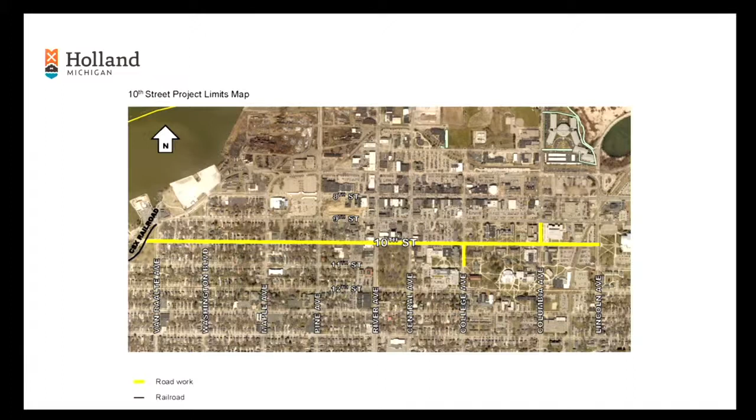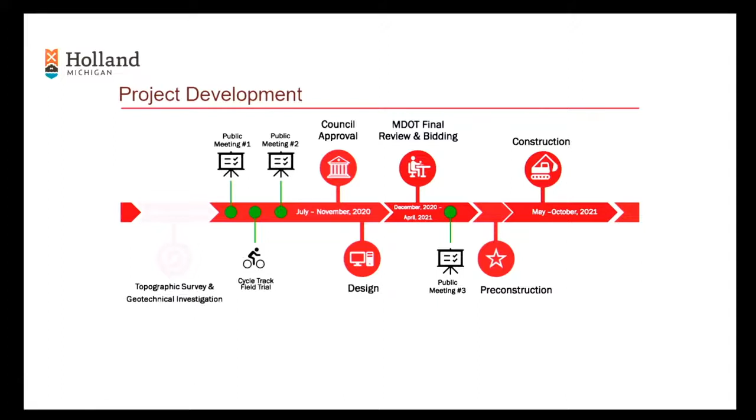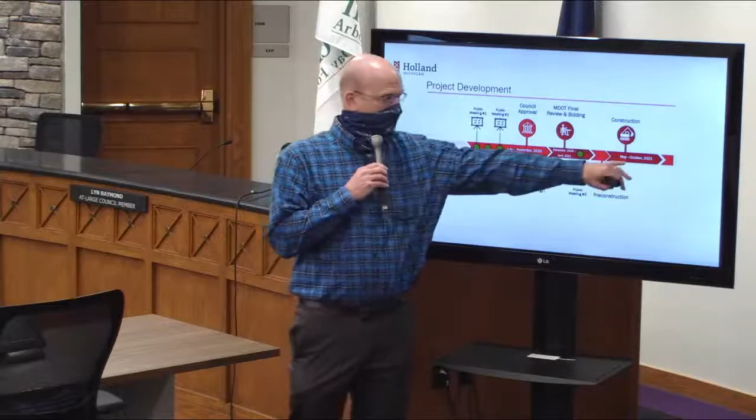The project development timeline, again you've seen this slide before, but we're basically sitting about where the star is. Public meeting number 3, we didn't quite make April, we're into May. But construction is going to get started here on May 17th, next week, Monday. And then we're going to go through the end of October with the construction schedule.

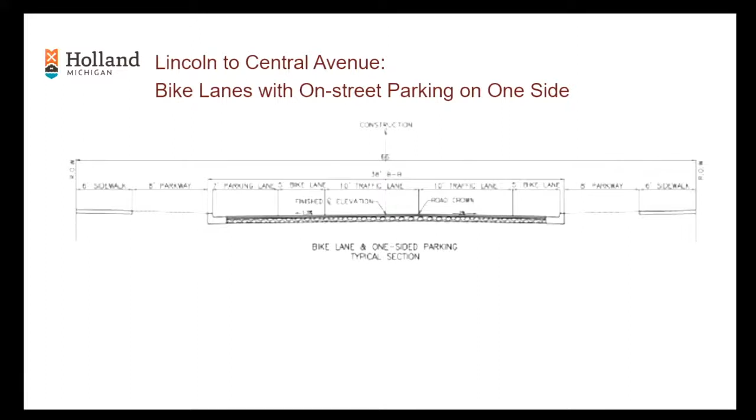In terms of the road cross section, apologize for the slide here, but I can describe it to you. From Lincoln to Central, and this is basically through College campus, we're going to have the 2 through lanes, parking on one side of the street, and bike lanes throughout.

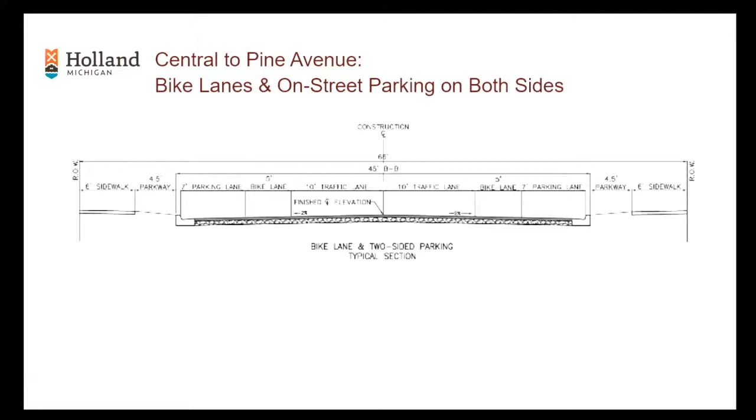Yeah, on-street parking, parallel parking. From Central to Pine, we're going to have bike lanes and on-street parking on both sides, so we're going to retain that. And then from Pine to Van Raalte, we're just going to have parking on both sides.

No non-motorized path, so no bike lane there. We will put sharrows down on the pavement, but those are going to basically be within that travel lane. So then there's going to be parking, again 8-foot wide parking on both sides, 10-foot travel lanes, very similar to what it is now out there.

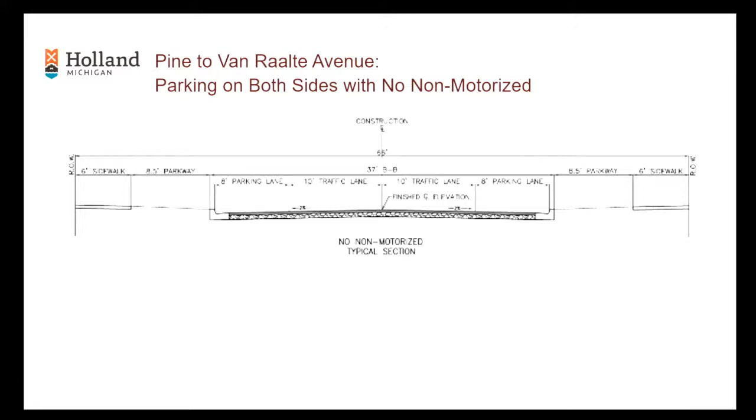All right, storm sewer design. We're going to take some opportunities here to line some existing storm sewer. There's a fairly decent sized storm sewer main on 10th Street between Central and Pine, and that one is still in pretty good shape according to our videos of the storm sewer. So we're going to utilize that vitrified clay pipe and line it, because it probably won't hold up to construction real well, but we'll line it and leave it in place, and the catch basins and all the other appurtenances will be replaced.

We're also going to take this opportunity to line a section of Pine Avenue storm sewer between 10th and 11th. Those of you who were around for the 9th Street project know we did some lining along Pine from basically 9th Street to 10th Street a few years back. So this is an opportunity to take that another block further. That's a pretty critical piece of storm sewer infrastructure, an old clay pipe from 1913, and yes, it definitely needs a liner because we're going to be riding over top of it.

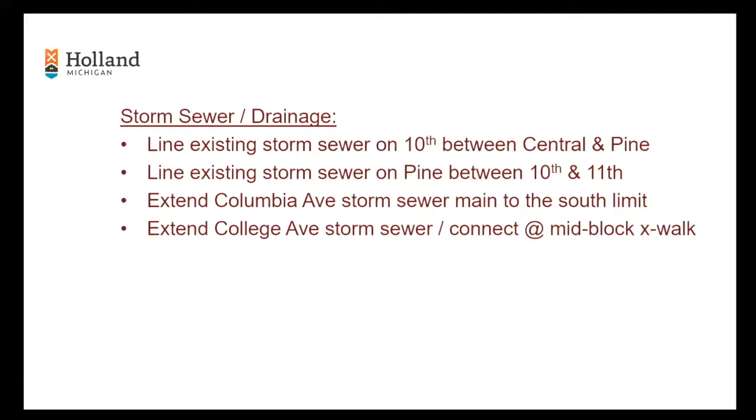We're going to extend the Columbia Avenue storm sewer main to the south. That's more for the college campus there. And we'll do the same with the College Avenue storm sewer, which will get connected into some infrastructure at that mid-block crosswalk at the limit on the south end. So that's storm sewer. I'm going to hand over the keys to Mark, and he's going to talk about the utilities.

Our sanitary work will be mostly focused down in the campus area, from River to Lincoln, River to College. This is to replace some old sewer in that area, get down to, we actually have two, get down to one sewer and replace that. We have lined the sanitary sewer in other locations, so we'll be focusing on some sanitary lateral work in those spots also, but a lot of the sanitary work is just focused down by campus for now. It's our first chance to really get back in there.

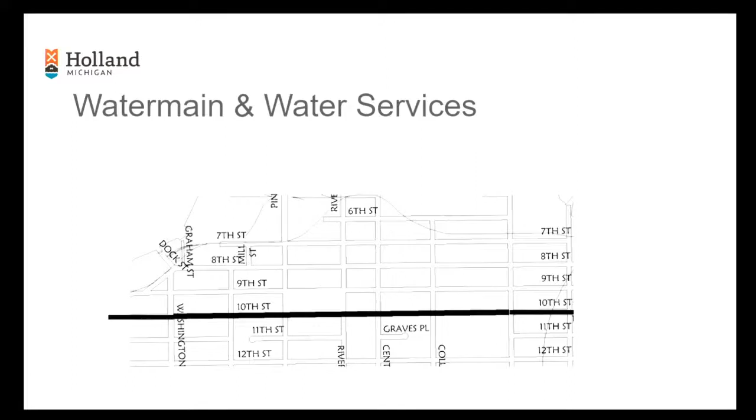Water main, we're going to end up replacing most of the water main on the project, and that includes some replacement of the water services in that area. Most of the water services will get replaced along with the historic age of the main. So the water service replacement is one of our big concerns with this work.

This relates to some changes in the state law where if your water service had any part connected to a lead-containing material, we have to replace the water service up to the meter in your basement. To do this, I need an agreement from the property owners allowing us to enter the property and replace what is essentially still owned by the homeowner. We're going to use a trenchless technique, so we should be able to get that pipe in without tearing up your yard. And all the work inside the home is done by a professional plumber.

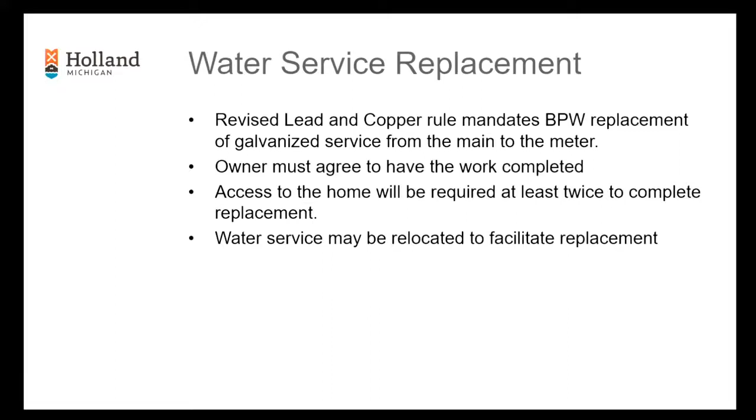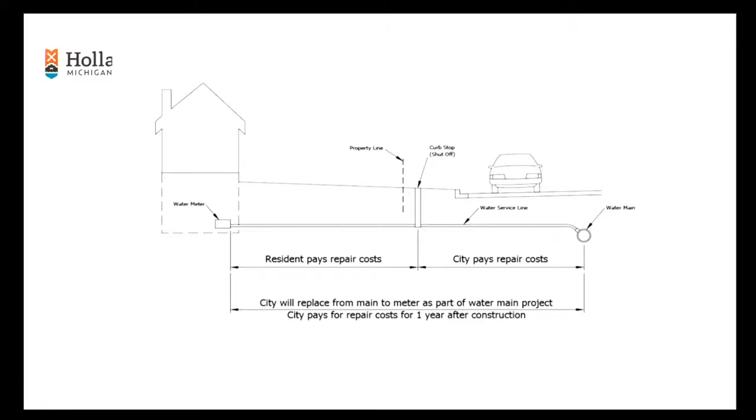So we're focusing on this. The water service replacement refers to this portion of the water service coming into the home, and it's only during this project that we're going to be working on that -- the little piece between the main and the home. So if you got a letter and some stuff from me and you haven't sent it in, please do. Or flag Doug down when we get on site, and we need to get that signed agreement from you.

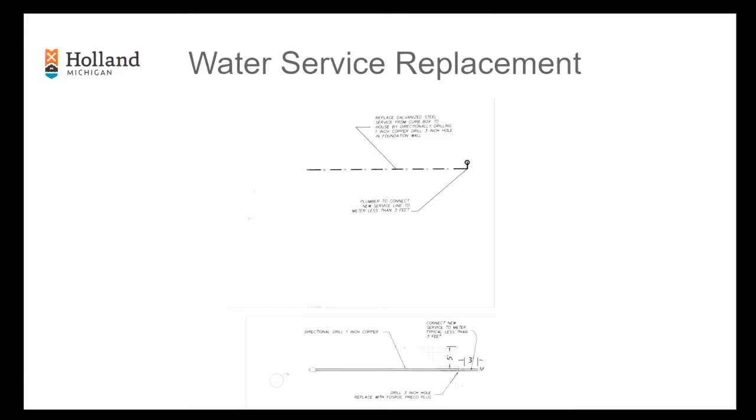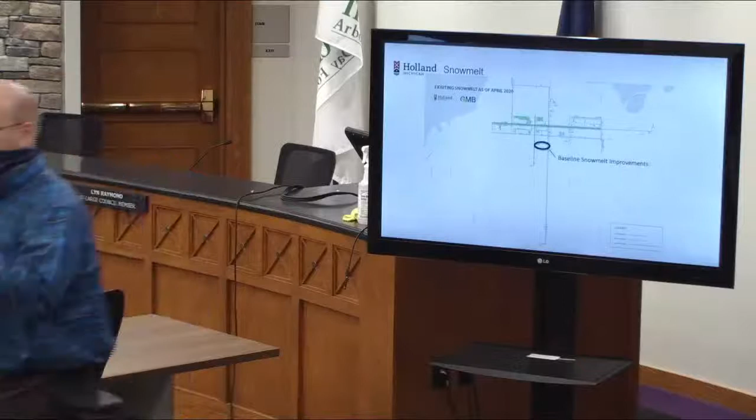Okay, thanks, Mark. So there are some snowmelt improvements planned for the project. Apologize for the scale of this map, but basically that area is between Central and River. We do intend to put snowmelt on the sidewalk, particularly on the south side along the park, but we're also going to hold public meetings here in the next couple of weeks and talk about sidewalk on the north side in that block with the property owners there -- AT&T, the parking lot at the corner of Central, and then there's a condo development. So those of you tuning in from that area, just know there'll be subsequent meetings specific to snowmelt and the extent to which we do that work.

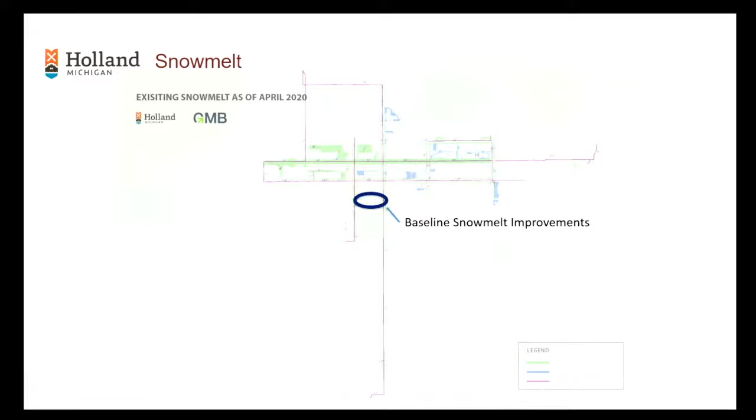So there'll be a series of meetings, and that will involve an assessment for those property owners that have the snowmelt being proposed out in front of your parcels. That's about it for the snowmelt. I know we've had some other inquiries about snowmelt, and for those folks we're in progress talking with, we'll certainly continue to correspond. So we may grow the snowmelt a little bit, and that's not uncommon.

Unfortunately, we always get some 11th hour interest, and we'll deal with it. We always have. So we like snowmelt, we want to put it in where we can. So still opportunities for those of you who may be considering it.

Just let us know sooner rather than later. All right, so some construction-specific information. We're going to start next Monday and finish at the end of October, hopefully before Halloween.

Throughout the project, trash pickup will continue as normal. We ask that you bring your cans out to the end of the driveway as you normally would, and put a piece of duct tape on it with your address number. I know sometimes the contractor has to grab those cans and bring them to the end of a block or something like that, and it's helpful to get those cans back to the parties they belong to if there's an address attached to them.

Mail delivery, I think this is a foot route, right? So that'll continue with mail delivery. We'll coordinate and make sure that USPS knows what's going on.

Another thing you'll see arrive shortly - I know you got the notices for the meeting, but now that we have the contractor in place, we typically will list out the construction phasing and the key contacts on a postcard. So be looking for that postcard. That'll have good project information on it.

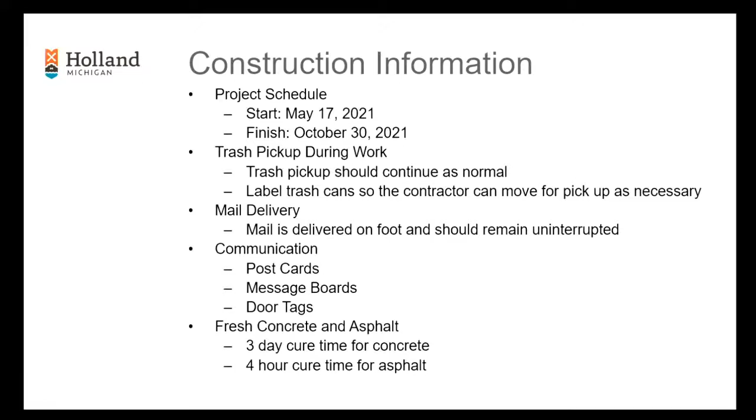The other thing is we stood up a website on our City of Holland website. That was listed on the latest correspondence, and we'll put it on the postcard as well. We're going to update that - Tammy's going to keep it maintained on a weekly basis. We meet with the contractor at least once a week, and the offshoot of those meetings, we typically try to capture in an update for the project. So be looking for that.

We reserve this for when we get ready to change phases. We'll typically either send out a postcard, put message boards out for that next phase, or if we've got your email, we'll send an email - not only weekly with that update, but also ahead of these phase changes, when we're going from one section to the next. So keep an eye out for that.

And then door tags - you'll see those from time to time. Typically that's going to be related to utility work, and usually water service related. So if there's a planned interruption on your water service, i.e. when we tie the water service over from the old main to the new main, or if they're running new service lines to your meter in the basement, then you'll probably get some interaction that way. Again, those are door tags they typically put out a day or two in advance on your front doors. Don't be surprised if you see those - they're perfectly normal, and they'll have the information right on the tag.

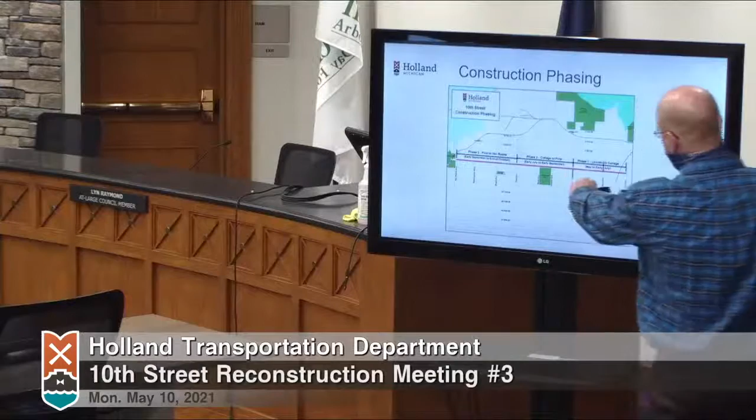Let's continue with construction phasing. Phase 1 is going to be from Lincoln to College Avenue, including those stub streets on Columbia and College. That's phase 1, and that's going to be May to early July.

Hopefully slightly before the 4th of July, we're going to send out a postcard to you. We're going to get message boards over in this phase 2, and we're going to transition to phase 2, which is going to take from basically early July to early September.

And that's going to go from College Avenue to Pine Avenue. We are going to try and stay out of River Avenue for as long as we possibly can, because that's really trouble traffic-wise. And then the final phase will be early September to the end of October.

That'll include Pine Avenue out to Van Raalte. All right, so that is the construction phasing schedule.

I can tell you last year with our 16th Street project, we hit it about to the day, which is ironic. That's pretty unusual. So we'll see how this turns out, but it's the same contractor doing this one, and I'm making a bet with the superintendent that he can't do as good as he did last year, so we'll see.

But again, you got to take that with a little grain of salt, right? A week here, a week there, depending on weather, depending on how things go. But I'd be surprised if we're pushing it much past the end of October with the construction schedule. So that's the phasing.

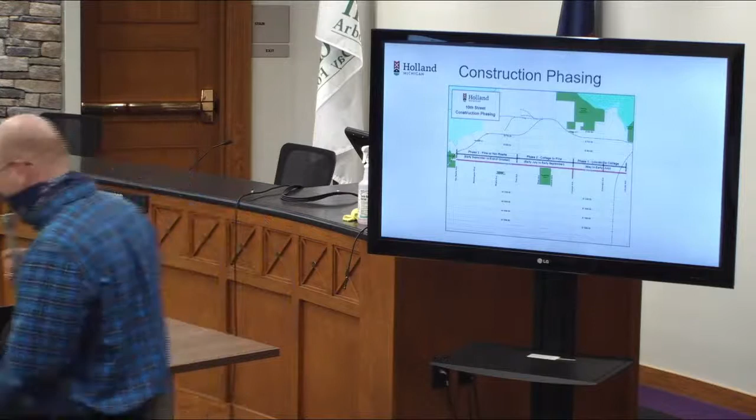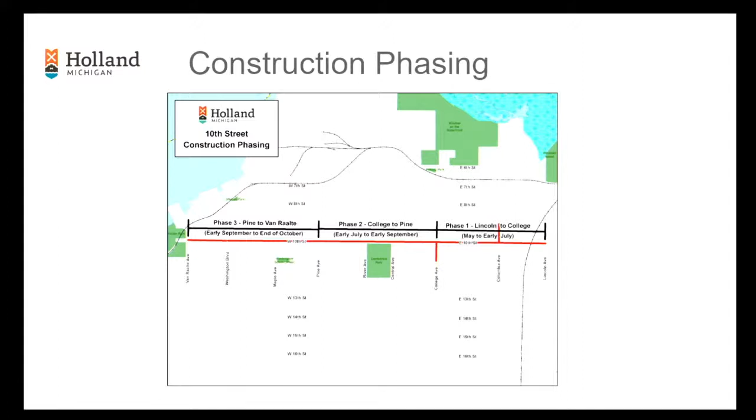You really shouldn't see a whole lot of activity. The tree removals, for those of you, just to clarify, have already taken place, and those things are done. We do intend to, when the project's all said and done, replant trees. We're very interested in doing that. We fully intend to do that. We've done that on all our other reconstruction projects, and it's a good thing to do.

So you'll see new street trees coming in. That probably won't be till November, though. We really like to wait to get those trees in the ground until things are dormant. So typically that's a November thing for us.

And it's a different contractor. We've tried doing it with the prime contractors, but they really don't care a whole lot about trees and how things look from that perspective at the end. So we get a landscaping contractor to do it, and it's turned out much better. We do it through a separate contract with folks that are in the tree business, so to speak, to try and get a better product. And it has been good over the years.

All right, sprinkling systems. Best to notify us ahead of time if you think there's going to be trouble with sprinkling systems. And by that I mean anything within the road right of way, anything on the road side of the sidewalk.

So let us know about it, make sure we are aware of it, before construction hits your phase. It would be great if you could flag those for us, and then we can work with you and Doug specifically on what needs to be done.

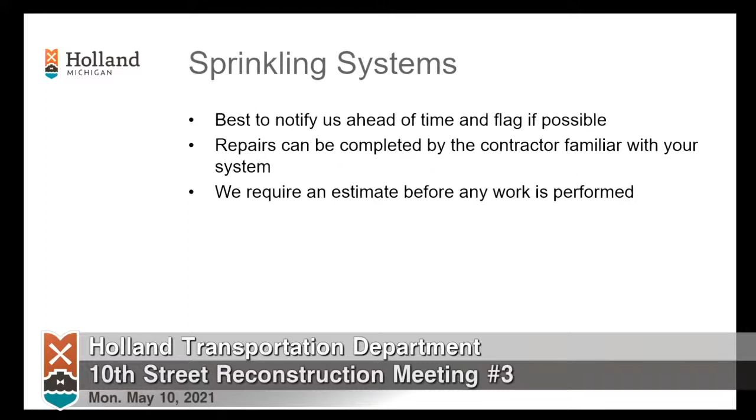There is an allowance in the project to restore and repair any sprinkler damage that may occur. We have some allowance set aside to make those repairs. They can either be done by our prime contractor, typically operating through a sub, often one of several local sprinkler companies. Or if you've got a sprinkler company you work with that's familiar with your system, we'll certainly allow those repairs to be made, and we'll make reimbursements to the contractor that you use.

I'll say that with a caveat: we'd like to see a bid before that work takes place. We want to make sure we agree with what they intend to do with the sprinkler repairs. We've done this for several years now, so most local sprinkler companies know us and appreciate what we're trying to do. But yes, make sure you put us in touch with your contractor if that's the way you'd like to go.

Sump pump connections - I don't think it's too bad through here with sump pumps. Typically that's in the higher numbered streets where we see a lot of those. But definitely sump pumps should discharge clear water - this can be groundwater, roof drains, or perimeter drains. What this should not be are floor drains or laundry drains hooked into this, because this goes to the storm sewer and out to Lake Macatawa. So again, clear water sump pumps, we want to know about those.

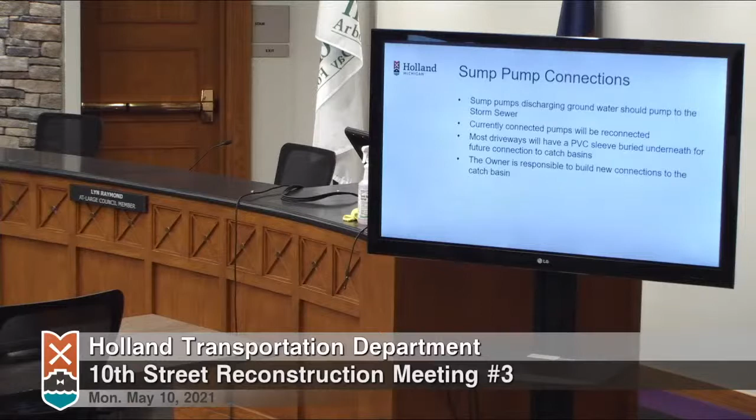Now, in order to facilitate that, we put PVC sleeves underneath most all the driveway approaches. So if you have a driveway approach and you don't have a catch basin out in front of your property, you will have a driveway sleeve.

That'll allow us to get to a structure, either to a neighbor across their frontage in the public right of way and underneath driveways, to get to that nearest catch basin. Those can also be used - we typically oversize those sleeves so that if you want to run sprinklers or whatever through there, you can. Those are typically marked; we have the contractor put a little piece of rebar there so you can find it with a metal detector, and they aren't buried too deep either.

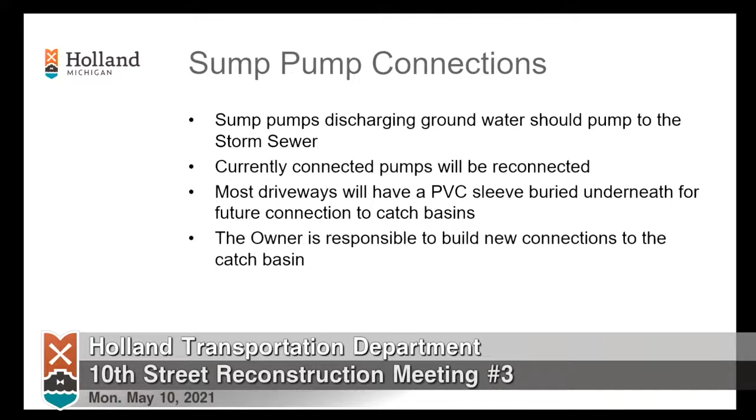Yeah, the owner is responsible. So again, if you're not connected already but you want to be, just have your contractor coordinate with us, with Doug in particular, to get those connected in.

Our field contact, Doug Hughes, there with the four-leaf clover lucky hat on, is going to be the construction inspector for the job. As long as he's not taking a really long vacation, he'll be the guy out there every day with the contractor. He's going to know exactly what's going on and will be best informed to coordinate on any questions, particularly from a field perspective. The postcard we send out to you will have Doug's cell phone number on it - great one to put on a magnet on the refrigerator and shoot him a call or text if there's a question at any point, particularly during construction.

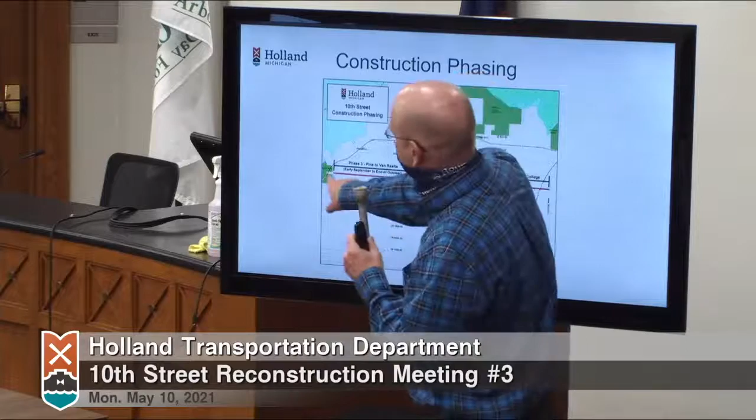The other piece of this too, Lincoln, we're kind of handling in a similar fashion. Lincoln's a pretty important north-south route. We've constrained it to a couple of weeks, and that's going to come right out of the gate. We've already got a message board out there saying, starting on the 17th, you're going to have to follow the detour for Lincoln.

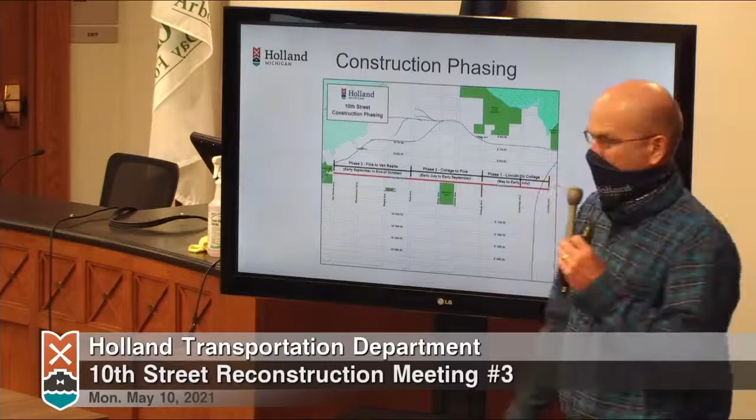That same thing will happen with Van Raalte. You'll see a message board out there before we take it down. We'll start doing that coordination a couple of weeks ahead, talking to the folks at the terminal. Inevitably, we'll have a fuel truck that sneaks by, and these guys will make it work and just get them through. Yeah, they come down 8th Street or 7th Street expecting to get through, and there's no way to turn.

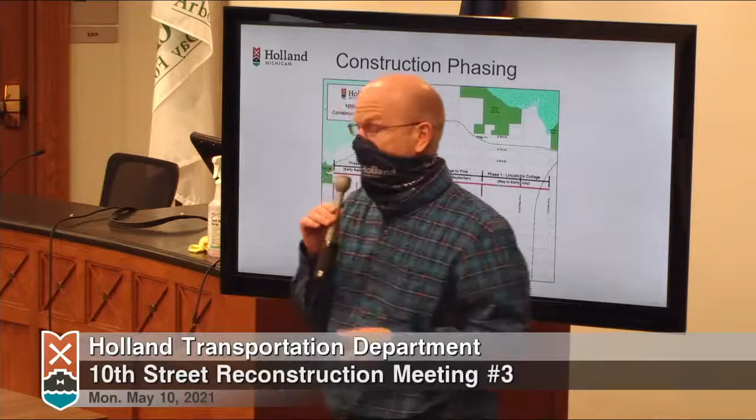The other thing that's important too is River Avenue, obviously. That one's a big one for us, and we do have to get a couple things through River. So we're going to try and do that part width and keep traffic at least one lane in each direction going at all times. But River, that's going to be a tough couple of weeks, and again, we've constrained them on River. Yeah, that's the plan at least there.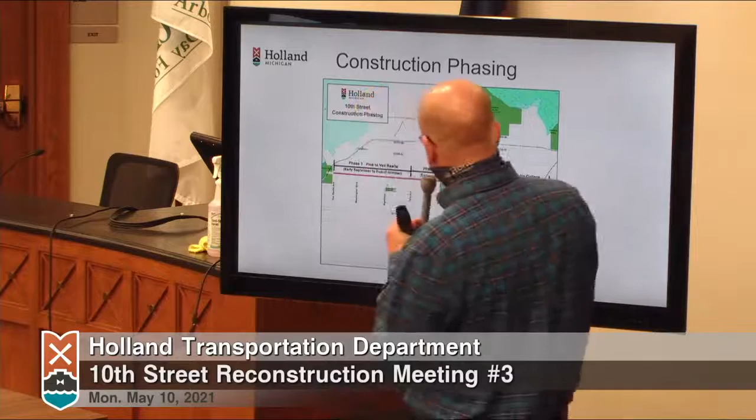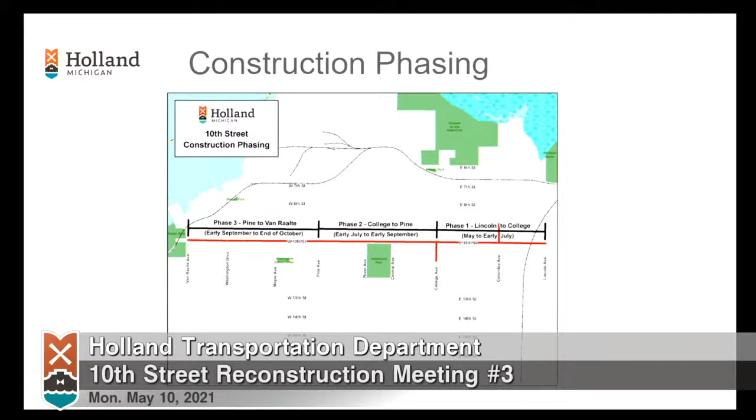So when you bore from the street up into the basement, do you do electrical? I'm going to pass the mic over to our expert. Yes, so the question is, when we place the water service from the street into the home, is it similar to electrical? And the answer is yes. We use copper instead of the plastic, but often it is the same contractors that do the same things. So yes, it is a directional drill into the home. Dig a hole inside the basement? I've seen them as small as about 3 inches, and so, yes, it's kind of terrifying that they can hit this little hole in the wall.

They've got a few years' experience and a good track record with it. So it's known that the contractor that does this, Gustafson, we've worked with them for the past couple of years, and it's pretty surprising how accurate they can get those bores. They get it in there. I would say this is the industry standard, so if you called a plumber or anybody else to do this work, they would do the exact same thing. It's not like a special one-off.

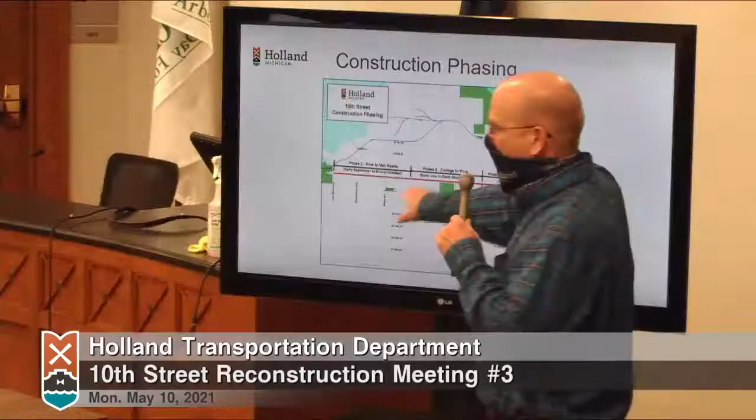So we may not do a whole lot of updates coming out of the gate, but as we get into the other parts of 10th Street that aren't on campus, we'll keep those weekly updates coming. Email's the best way to do that, but we'll also post that same information on our website. In terms of construction scheduling, we'll keep this on our website too. The contractor may be moving ahead faster than expected, which could turn into mid-June for us to switch to phase 2, but we'll communicate that ahead of time with everyone.

On-street parking, that's a good question. May 15 was when that started, and I think it's middle of October when that ends. Tammy, do you know? I think it's May 15th to October 15th. October 15, yeah, kind of what I remember the sign saying.

We don't get too excited with ticketing folks who are on the route. The police obviously know we've got construction going on, and we communicate and coordinate with them. There's going to be times where you have to park on the road in front of your driveway. Typically it's a 2 or 3 step process: there's a time where the concrete curb and gutter gets poured and you won't have access, a time where the driveway approach gets poured, and another time where the sidewalk crossing your driveway gets poured. Some of those things may happen together, sometimes not, depending on where the contractor and subcontractor are with the phases of that specific area.

Typically, folks will park right next to their driveway on the street. There's not going to be any through traffic, it's all local traffic since it's just gravel or that first layer of asphalt. So nobody's going to be ticketing regardless of the time of year. And if you do get a ticket, contact either Tammy or myself or Doug, and we can work with the PD to make sure that goes away.

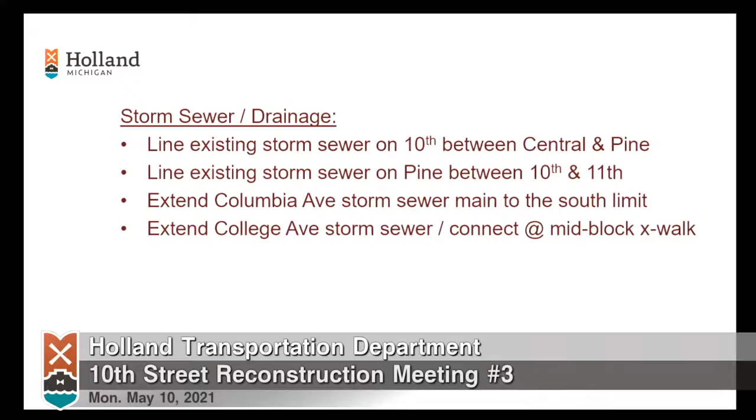We ran a camera down through the pipe all the way to the street, and that pipe must be replaced because it's like green. Yeah, that's C900 pipe. You're talking about sanitary sewer, probably? Do you have a specific question about sanitary? Would that be replaced again? No, especially if it's green — if it's green, that's good. We had to figure out how far it's green, but it's green up to the house.

So we're going to hit on a couple issues on that. In the city of Holland, the homeowner owns the lateral from the main to the home. So we touch the laterals when we rebuild the sewer, but we only rebuild them up to the property line — that gets back to right of entry into property. When you see that pipe transition to the new plastic pipe, that's about where the sidewalk is, the property line. It's PVC SDR 26 plastic pipe. We're not going to replace those.

Part of what's going on with this project is we're overlapping old and new infrastructure, so that's why my sanitary scope is really limited. At times we have rebuilt sewer in other areas, particularly down at the west end. So your lateral, while it's probably not old, is up to our current standards, so we won't be working with that.